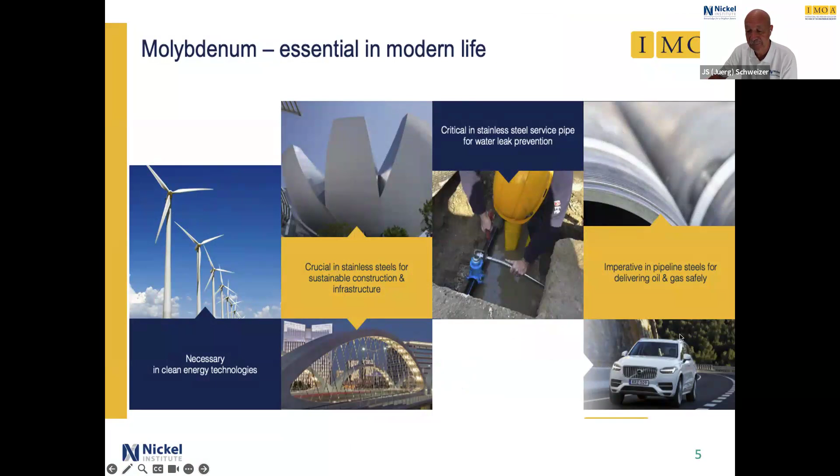And now to the most important part. It gives me great pleasure to introduce Gary Coates to you, who most of you already know from previous talks. He's our technical manager in the Nickel Institute and sits in Toronto. Gary is a metallurgical engineer who has worked in the stainless steel and nickel alloy industry for almost 50 years, the last 25 with the Nickel Institute. He has worked with many different end-use industries and with fabricators to ensure quality fabrication and long life of equipment. He is actively involved with many professional societies in the corrosion, welding, metals, and mining industries. He has made many presentations on all aspects of the use of stainless steel and nickel alloys. Gary is a professional engineer registered in Ontario, Canada. And now I would like to hand over the floor to you, Gary.

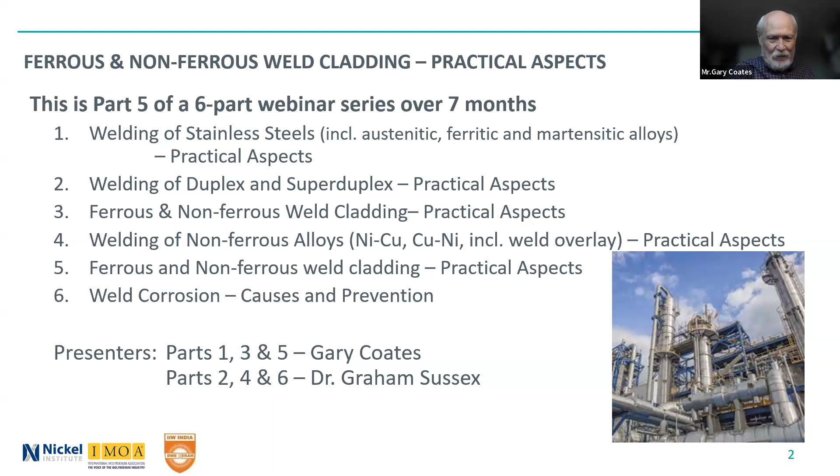This is part 5 of a 6-part series over 7 months. You can see the different topics we've talked about, and the 6th part, the final one, will be held by Dr. Graham Sussex on weld corrosion, which is an extremely important part of using stainless steel and nickel alloys. You want to avoid corrosion, and it's easy to have corrosion where you don't expect it. Make sure you sign up for that session.

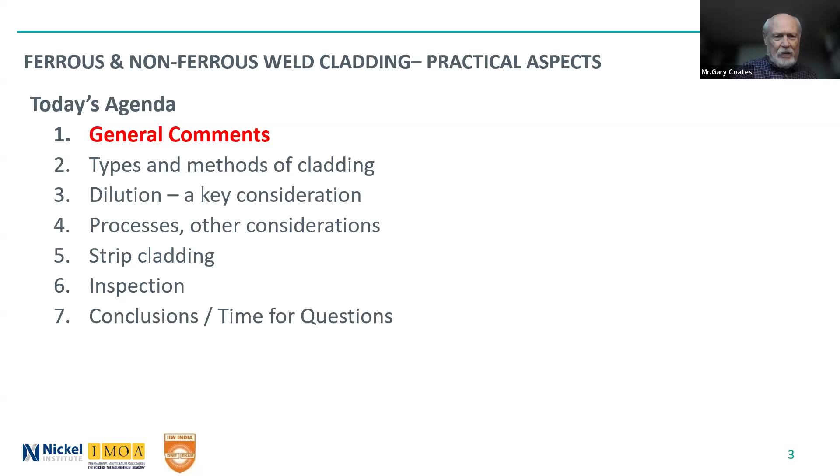So this is today's agenda. We're going to have some general comments, and talk a little bit about different types of cladding, because weld cladding isn't the only one - a very short part. Dilution is probably the key consideration when it comes to weld overlay. We'll talk about processes and other considerations, a special little session on strip cladding, which is relatively new, a couple slides on inspection, and then conclusions and time for questions. So what is cladding?

Essentially 2 or more layers of different materials that are somehow attached to each other. Sometimes we call it composite materials. In this webinar, we're going to primarily talk about where 2 different metals are metallurgically bonded together.

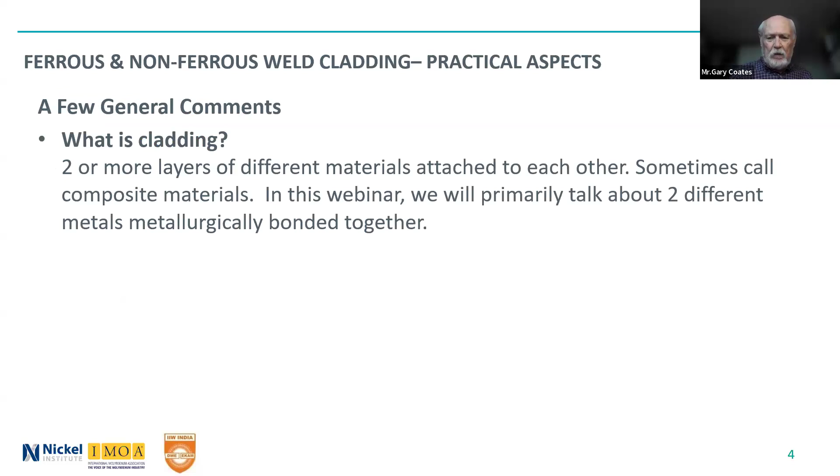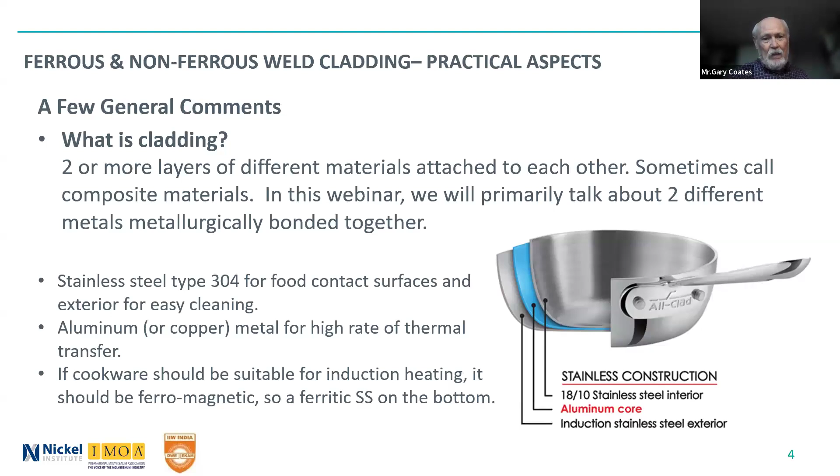Here's a common example of a stainless steel pot, a high quality one, where you actually have 3 different materials. You have type 304 for food contact surfaces, ideal for the interior and exterior for easy cleaning and hygiene. You have aluminum or even copper for the high rate of thermal transfer. And if you're using induction heating, you want the bottom part to be ferromagnetic, so a ferritic stainless steel is used there.

Why do we do that? Well, there are so many different advantages to doing a clad, depending on what you want to do. Corrosion resistance, of course, is the main one. Strength and mechanical properties - you might use one material that's very strong for one side, and want corrosion resistance on the other side. Thermal conductivity, weight saving sometimes, ferromagnetism - either for or lack of ferromagnetism - wear properties, electrical conductivity. But in a lot of cases, economics is the major factor here, and the idea is that using cladding, in many cases, is to reduce the cost.

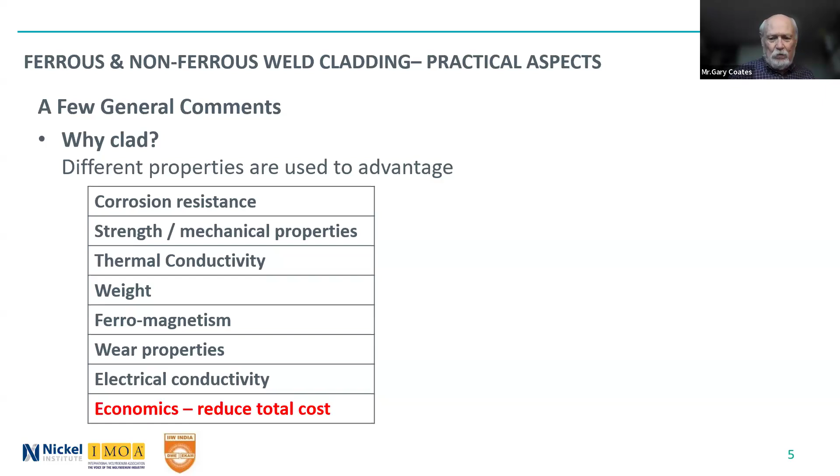Now in the case of the pot, no, it wasn't for cost - it was done to create a superior product, something where the pot heats more uniformly when you have that aluminum core.

So let's talk about economics. There's an assumption a lot of people make that says, well, if it's clad - if you have stainless steel on one side, carbon steel on the other - it's going to be less expensive than solid stainless steel. Well, that's not always true, and it depends on a lot of factors. I just list a few here.

The quantity needed - if you need a small quantity, it may not be less expensive. The relative cost of the two materials, the cladding process used, the thicknesses of the two materials. Obviously, if you want 3 millimeter of one material and 3 millimeter of another, the total cost may be more than if you use solid material. With clad, you have a lot more testing involved, non-destructive examination.

You may have to test the bond strength, or do special mechanical tests to make sure it's suitable for the application. And for corrosion, if you do a heat treatment, you might want to make sure the corrosion properties haven't deteriorated through the heat treatment. You might need special procedures for hot or cold forming so you don't tear the bond between the two materials, and special procedures for welding. So it's not a given that solid material is going to be more expensive than clad material.

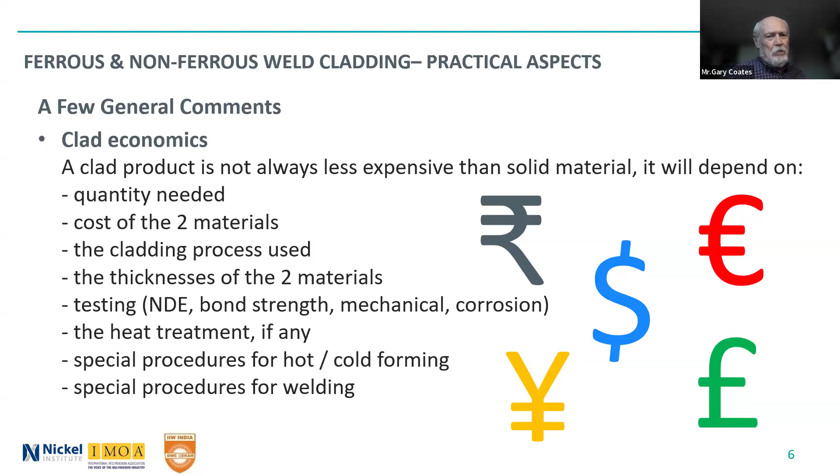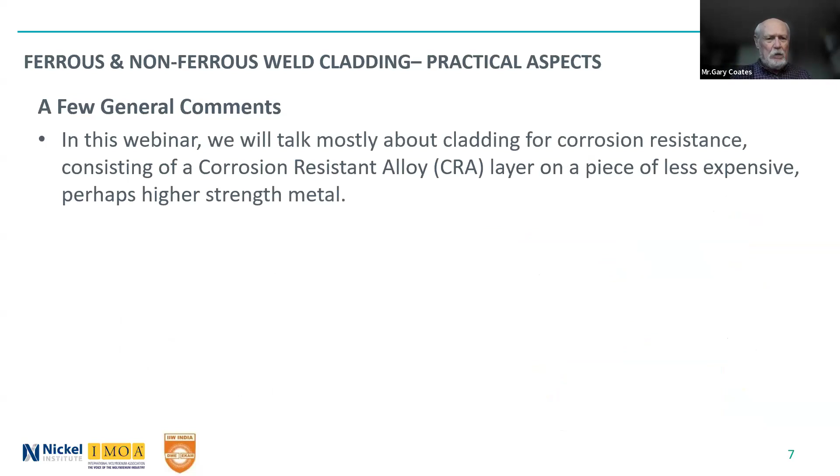So in this webinar, we're going to talk mostly about cladding for corrosion resistance. We talk about a corrosion resistant alloy, or CRA layer, on a piece of less expensive, perhaps higher strength material. So the top is a smaller, thinner layer of the corrosion resistant alloy, and we say the backing material is the thicker, less expensive material.

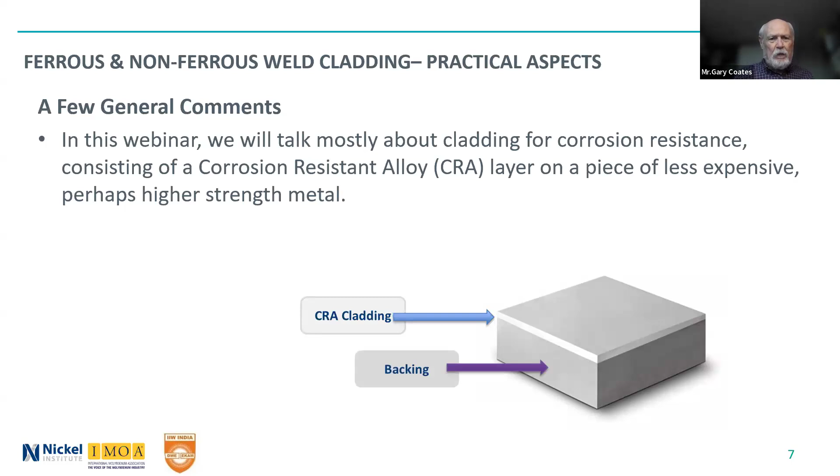I'm going to make a few general comments about possible materials, considering all the different cladding methods, not just weld clad, because not all these are possible. You can use different materials: plain carbon steels, high carbon steels, low alloy steels, chrome moly steels, quench and tempered steels. Stainless steels of all families can be used, whether austenitic, ferritic, duplex, etc. Nickel alloys of all families, including nickel copper alloys, and not particularly with weld clad, but titanium, zirconium, niobium, tantalum - all these special materials can be done by certain cladding methods.

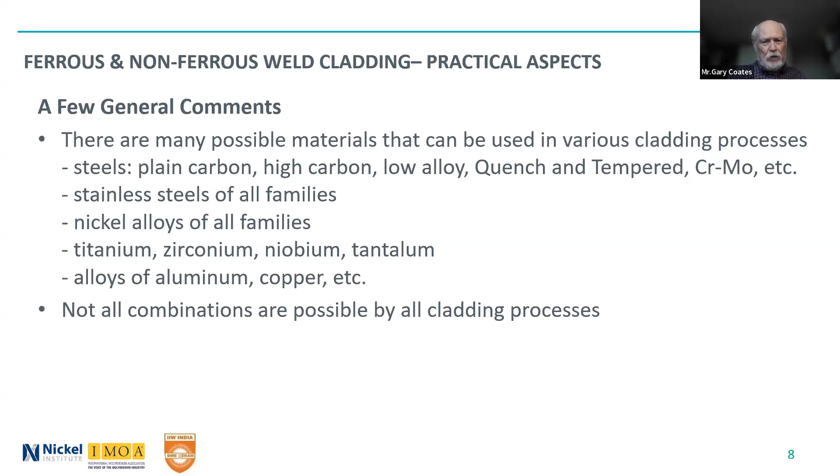And we get, as we saw with the pot, alloys of aluminum and copper can be done. I emphasize not all combinations are possible by all cladding processes, and we'll look at that.

So let's move on to the types and methods of cladding. It's important to understand that there are different types of cladding. We talk about metallurgically and fully bonded, and that's the ones I'm going to be talking about, and weld clad falls under that category. Partially metallurgically bonded - if you do a sheet lining, you line a tank with a thin layer of stainless, that we call partially metallurgically bonded because you're welding it in certain spots, but it's not totally bonded.

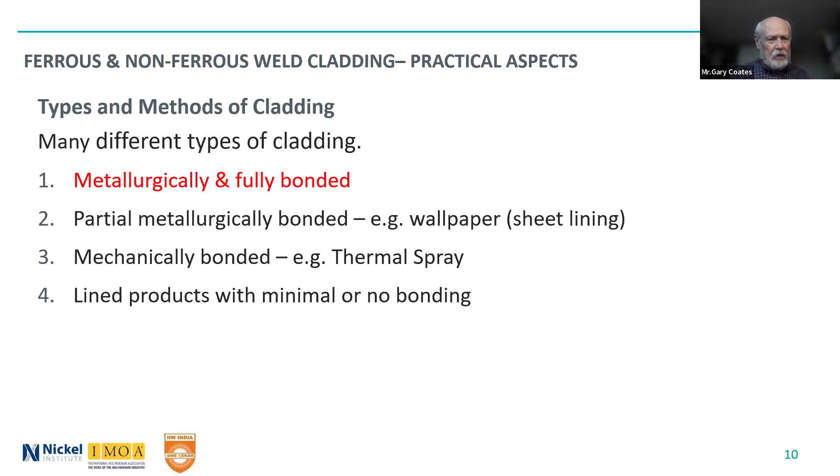Mechanically bonded - a good example of that is thermal spray. Thermal spray does not metallurgically bond the sprayed material to the backing material. It works in many cases, but not always. And then there are some lined products with minimal or no bonding at all. But we're going to only talk about the metallurgically and fully bonded materials.

And those can be, there's 5 examples of that. Weld overlay, of course, is what we're going to be talking about here. I'm going to briefly mention hot roll bonded and explosion bonded material, because each of these methods has their advantages and disadvantages. And of course, I'm not going to talk about additive manufacturing, but that's also one of the more interesting areas under development.

With additive manufacturing, it's very similar to weld overlay, except the whole piece is a weld material. And you can do transition layers - there you go from one material to a second material with additive manufacturing. A lot of work is going on in that area, and I really suggest to young engineers that are just graduating or have a few years of experience under the belt, that's an area that is really going to develop rapidly over the next few years.

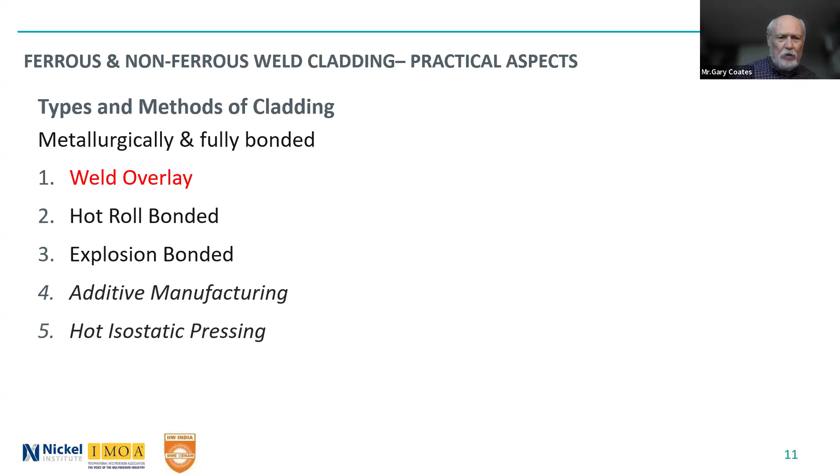And then there's hot isostatic pressing. You can do clad materials as well as solid materials, but I'm not going to talk about those last two processes. So let's talk about hot roll bonded material.

This is a very simplified production scheme. I've left out a few of the steps, but just so you know how it works - on the left, you make a sandwich. So you have a backing material, a CRA layer, another CRA layer. These are all plates or sheets, and then more backing material. You actually weld it up, suck out any air that might be there.

And then at a conventional rolling mill, you heat the slab up and then roll it to the final thickness. You do a heat treatment, and then you eventually separate the two plates. You have a separating compound in between that doesn't allow the materials to fuse together, and then you have your quality control step.

Well, this method is suitable for large quantities of clad material. They have a long delivery time - depends on what it is, but 3 months, 4 months, 6 months can even happen there. You do need to test for the bond quality and the strength. Is it fully bonded over its whole area, or has an area not bonded properly? And what is the strength of that bond?

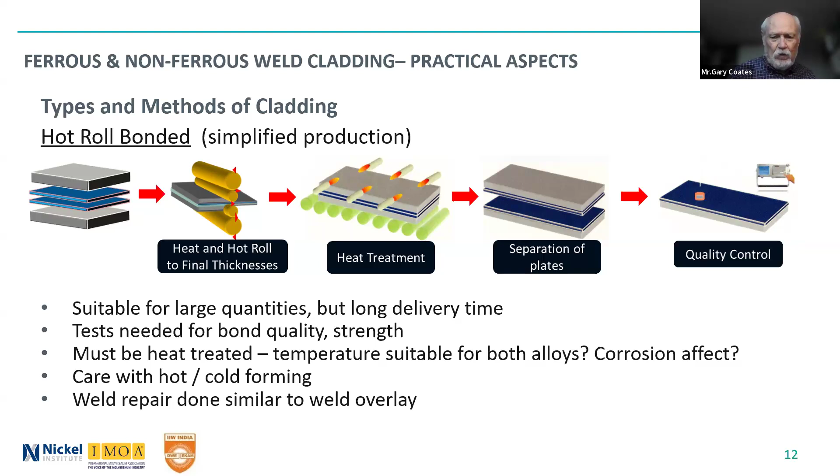The second major method is explosion bonded. Essentially you have your backing material on the bottom, you have a compound on top of that, and then you have your CRA layer on top of that. You put your explosive on top of that, and you get a big bang explosion there, and that will do essentially a pressure weld into the two materials. The cross section on the right shows that if it's properly done, you get a really, really good bond there.

So it is a very popular way of cladding. There's no heat involved in it. You might think, okay, with the explosion, you get heat. Well, there's really essentially no heat involved.

Advantage of this is shorter delivery time. If you can get both plates in stock, you're not changing the thickness, so you need the exact thickness you're after there. You can only do flat shapes, although they can be formed afterwards, of course, made into pipe or a head or whatever. One key factor: you don't need to anneal them after, but you usually do a stress relief.

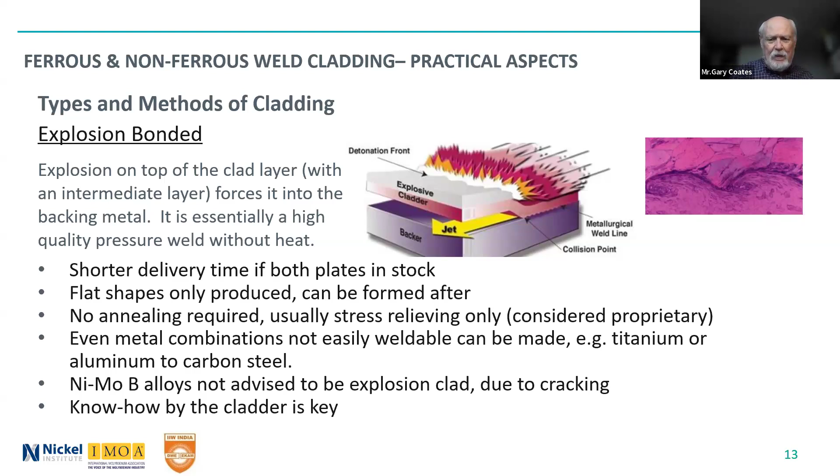There are a few alloys that you don't want to explosion clad. The nickel molybdenum Hastelloy B type alloys tend to crack because of the high stresses involved. Know-how is very important for the cladder. There's a lot of cladders who say, oh yeah, we can do that, and then they try it and say, oh, I guess we can't do that. So know-how is very important there.

We'll talk about each of these factors more a little later, but with weld overlay, just as a quick comparison, you do it in your fabrication shop. There are specialist companies that specialize in weld overlay. You can do a small job quickly. Somebody wants it done in 8 hours, and if it's a small job, you probably can do it in 8 hours. It's relatively quick for larger jobs too. So that is probably the number one reason for doing weld overlay.

You can do shapes. You can weld clad a head, because of course welding can be done out of position too. So that is a major advantage. Most often, no annealing is required or even wanted. We'll talk about that more. You might want to do a stress relief in some cases. Only alloys that are weldable can be used, so you can't do titanium on top of carbon steel, for example. They have to be weldable to each other.

We'll talk about the weld metal being slightly different composition than the wrought material, whereas with the other two methods, you're using wrought material. That occasionally is a factor. And you have to consider dilution of the base metal, and that's what we'll talk about now.

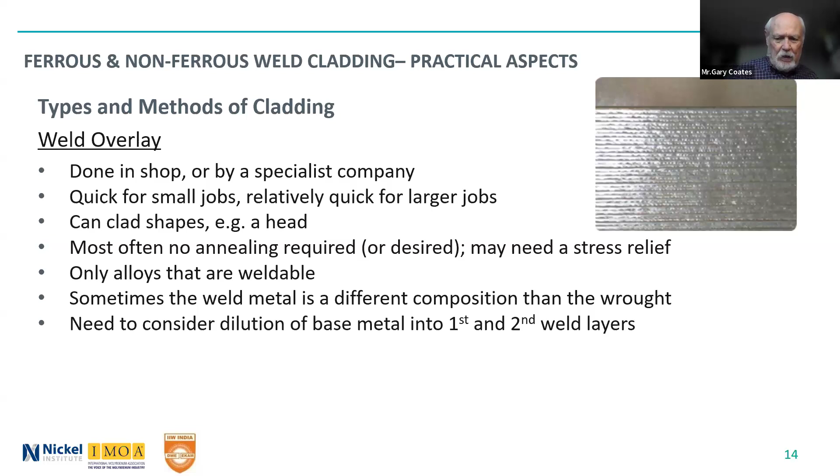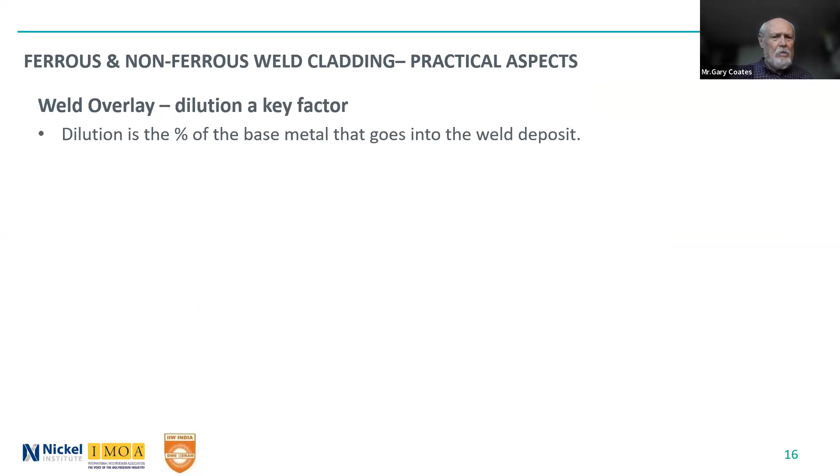So dilution, as a definition, is the percentage of the base metal that goes into the weld deposit when we're talking about a weld overlay. For example, I'm going to take a case where the end user wants a minimum of a 304L stainless steel composition on the weld overlay, and you want to do it with a single pass weld. Most often you don't, but we're taking that here using 309L, which is the filler metal that you normally would use if you're welding stainless to carbon steel.

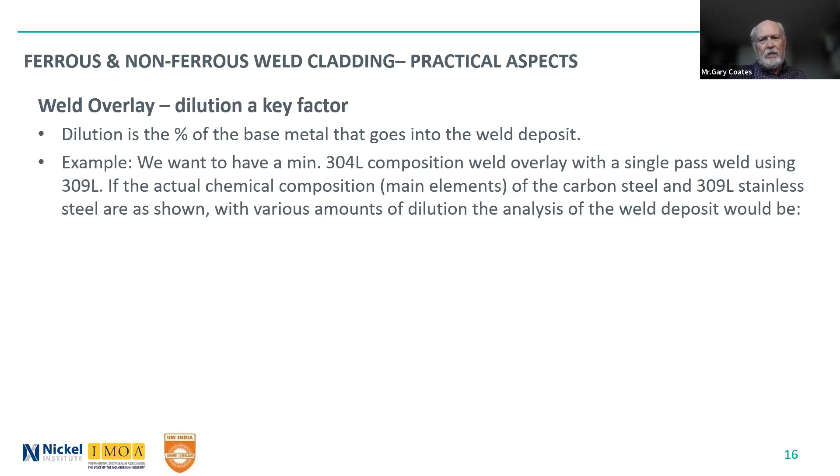You want the actual chemical composition, the main elements of the carbon steel and the 309L, and we'll show them here. So in the carbon steel, essentially of the three that we're concerned about here, it's only carbon, and I'm just taking a figure here, 0.15, and the stainless steel 309L weld wire has low carbon, high chrome, high nickel.

So if you then say, okay, I can do a weld process that has only 5% dilution, at the bottom is the 304L composition. I didn't indicate the maximum chromium and nickel there, but we'll talk about that shortly.

If we do a weld with 5% dilution, which is really not easy to do or almost impossible to do, you could see that we can actually meet the carbon content less than 0.030 max, and you meet the minimum chrome and nickel contents there. Now that's above the 304L composition limit for chrome and nickel, but in many cases that is acceptable depending on how the end user has specified it.

If we do 10% dilution, a weld process that has 10%, you can see that we just exceeded the carbon content. That may or may not have any significance depending on the application. And again, the chrome is above the limit for 304L itself, but usually acceptable, and the nickel is actually into the area where it is within specification.

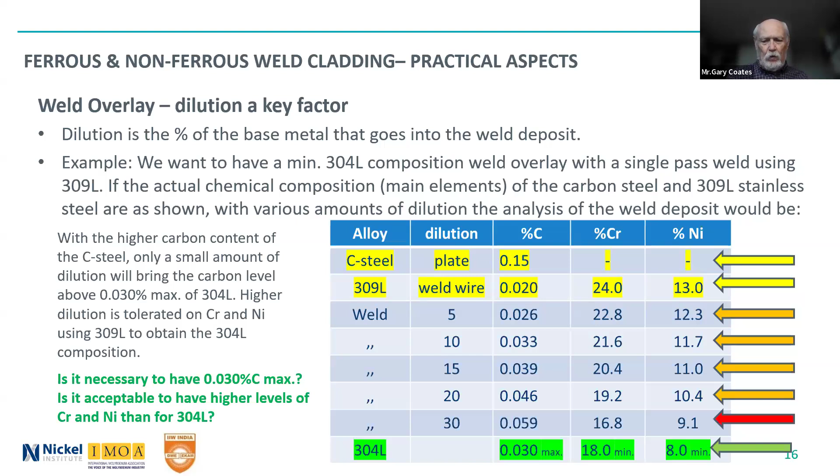And that's always the question. Can you live with that? Can the end user live with that? And is it acceptable to have higher levels of chrome and nickel than 304L?

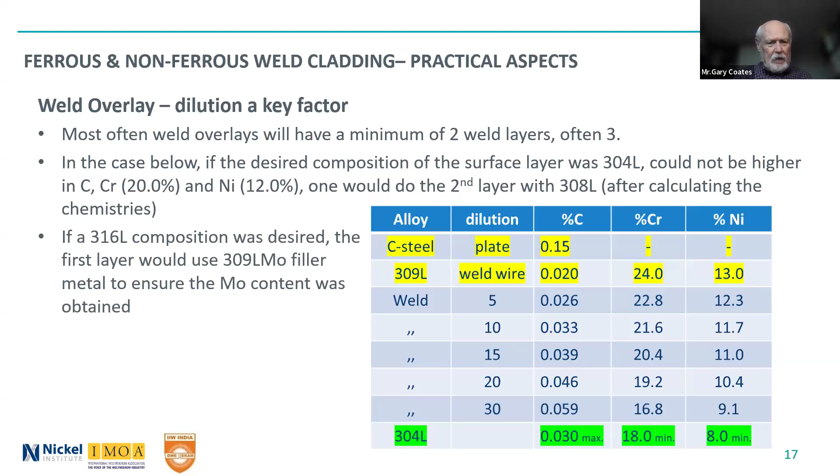So most often our weld overlays will have a minimum of 2 weld layers and often 3. In the case where you really wanted 304L on the surface layer and you didn't want the carbon higher than the 0.030 max and you wanted the chrome nickel to be in spec, you would do a second layer with 308L after calculating the chemistries out, depending on the dilution of the first layer. If you wanted 316L, you would actually start with a 309LMo filler metal because 316L has 2.0% minimum molybdenum. So you got to make sure that you get the higher molybdenum content in that first layer, the transition layer.

So let's talk about processes, and we'll continue on with the dilution discussion with the different processes here. This chart shows a lot of information, actually, which you need to study in depth. Basically, we're talking about the deposit thickness of a typical weld overlay with different processes, the deposition rate, which of course for economics of production is very important. There's the dilution, which we talked about, deposit efficiency, how much you get - that again is an economic factor. And of course, the consumable material used there.

So if we take gas tungsten arc welding or TIG welding, you don't get a really thick deposit. You don't get a high deposition rate. It's relatively slow, as we all know, but you do get low dilution, or at least you can get low dilution. And that's one of the factors to consider - if you can do it in 1 layer or 2 layers with low dilution, you can be more economical that way.

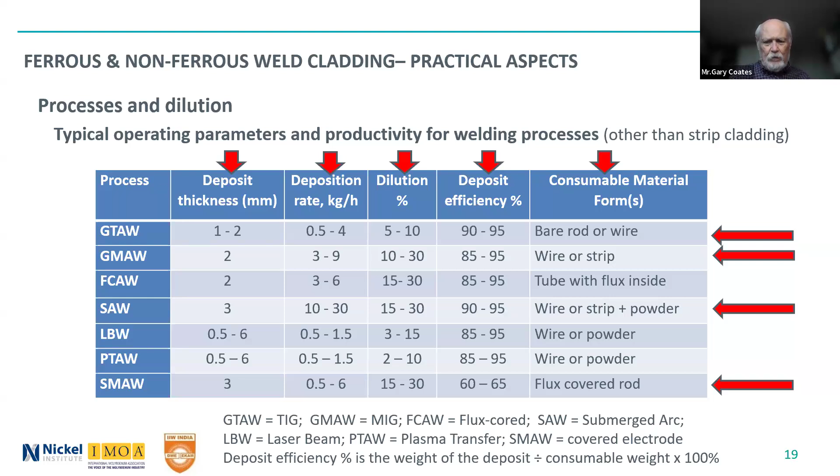This chart shows different processes and their deposition rates. If you're doing a large job, sub-arc is very effective, but if you use the sub-arc double wire process, you can get even higher deposition rates, probably without much change in dilution. The bottom ones are actually strip cladding, which we'll discuss separately.

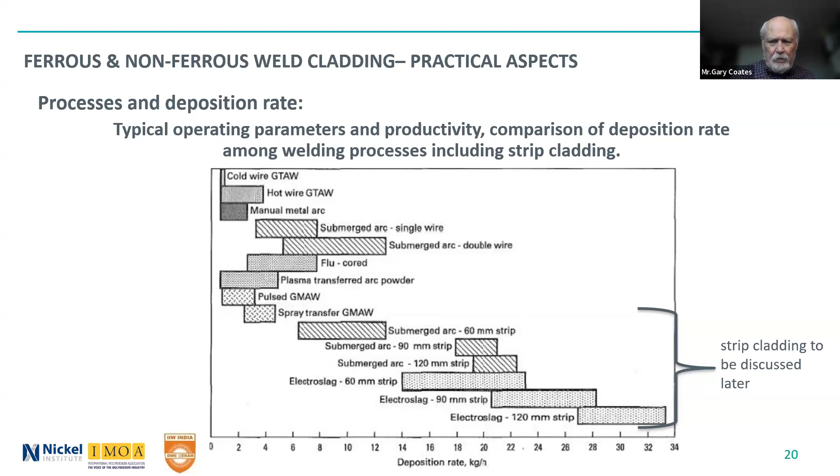So regarding the advantages and disadvantages of each process, we've already talked a bit about this, so I won't go into detail, but one reason flux core isn't used so much in weld overlay is the issue of slag removal. Sometimes that's not easy—if you're doing several layers, you have to make sure the slag is carefully removed.

The laser has expensive equipment to set up. It works well and you get low dilution, but it's very specialized equipment. Same with plasma transfer—it's not easy to do. There are some specialist companies that use these processes, but I'll leave that chart as part of the presentation for you to review when looking at how to do a particular job.

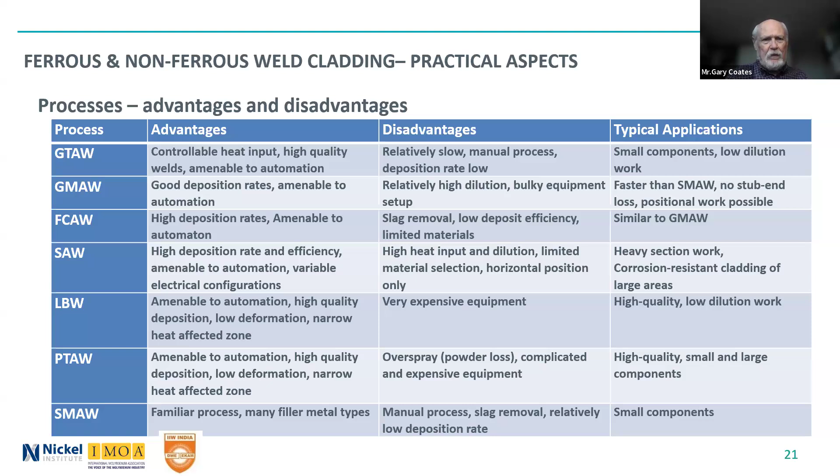Let's talk about a few other issues. One is there can be differences between the weld metal and the wrought material which may affect performance. Of course, chemistry is one of those things—it's sometimes different than the wrought material. So if somebody says they want alloy C22, nickel as the CRA layer, the chemistry in that case is very similar but a little bit different. Other alloys can be more different.

On the other hand, if you're welding two pieces of, say, C22 together using C22 filler metal, well, you already have it there, so usually that's not an issue. It can be an issue in a few very unusual cases, but it's something to check if somebody is asking for clad material of a certain alloy.

You have a cast structure of a weld versus the wrought structure of a plate. The same is true if you're welding two plates together—you have the weld, which is cast structure, versus the wrought structure of the plate. Again, there are a few cases where that is significant.

In austenitic stainless steels, you have a ferrite phase that's not present in the wrought material. Sometimes ferrite phase can be positive—one example is preventing polythionic stress corrosion cracking, which happens a lot in the oil and gas industry, so ferrite can be a benefit there over wrought material. Sometimes it's negative, because ferrite will embrittle at high temperature, reducing toughness or ductility.

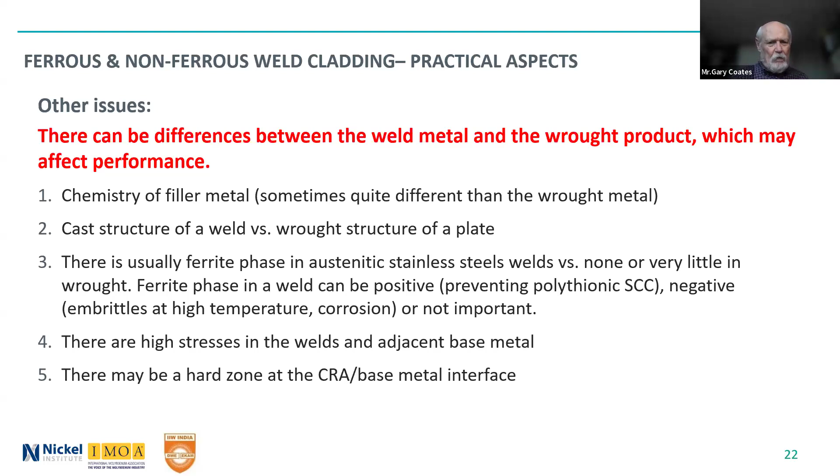There may also be a hard zone at the CRA base metal layer. If you use 309, you can get a very thin area with some martensite present, which may affect properties if you're doing any severe forming operation on the piece. It's just something to be aware of—you can't assume you can treat it like solid material.

So the compatibility of the filler metal against the backing material, essentially it's a dissimilar metal weld - austenitic stainless steels to carbon and alloy steels. You generally use 309L or 309 LMO, depending on whether you want the molybdenum there.

Occasionally you might use a nickel alloy for that, even if you want a stainless steel there, because the nickel alloy does not usually form that martensitic layer. The 309L, 309 LMO has a fairly high ferrite content, as you're well aware from the weld deposit. It's there to give better hot cracking resistance because carbon steels often have higher sulfur and phosphorus content than stainless steels. So that's a benefit, but you really need to, as welding engineers, calculate the expected ferrite content based on the actual chemical analysis, not the typical.

You don't want to use that. You want to use the actual chemical analysis of the backing material and the filler metal. So you have to make sure you get the actual analysis for those.

And then you have to estimate the amount of dilution. What most people will do, let's say you're doing it with gas metal arc welding, which has a wide range - you might say, with the amperage I specify in my WPS, it'll be 15% dilution, but you might want to look at both 10 and 20% dilution, sort of extremes, to see whether you're covered, just in case something happens where we're on the night shift when nobody is looking and the welder wants to get it done quickly.

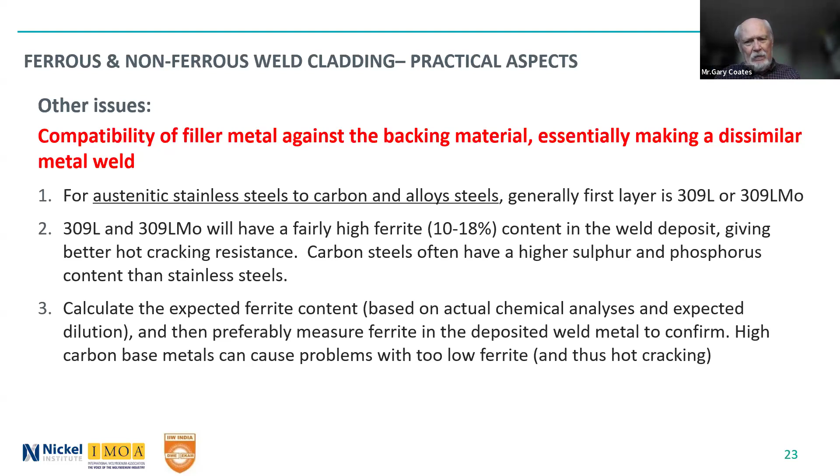The high carbon base materials, for example the 1040 carbon steel with 0.4% carbon, even with the 309L, can result in too low ferrite and hot cracking.

For nickel alloys to carbon and alloy steels, generally you don't need a special intermediate first layer. You most often use the nickel alloy that you're working with.

There are exceptions to the rule, as there are, as we all know, in welding. So the nickel copper alloys, you do need an intermediate layer - we sometimes call it a butter layer - perhaps pure nickel, perhaps another nickel copper alloy there. And that information is in the literature on what to do there.

Now, alloy 625, nickel chrome moly 3, or ER nickel chrome moly 3, is really the most common nickel alloy used for corrosion resistant overlays. It's relatively easily applied, readily available, and of the nickel chrome moly alloys, it is really the lowest cost. So it is used extensively for weld overlays.

So you have to be very careful about too high heat inputs. I remember a case where a fellow in Canada did an overlay with 625. He used the submerged arc process. He had a flux that welded beautifully, but it gave hot cracks.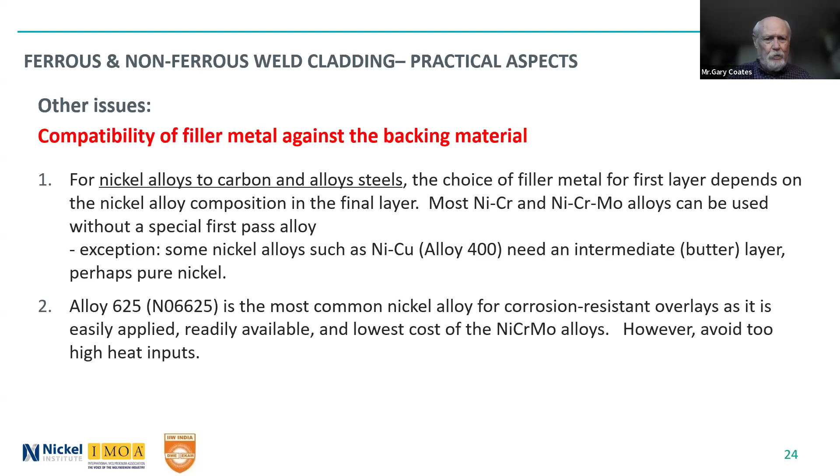So, heat treatment - and I saw there was a question in the chat already, or in the Q&A, about this.

You don't need any sort of heat treatment usually for the stainless steel or the nickel alloy, but you may need it by code purposes for the backing material. It's often a stress relief kind of material, especially for oil and gas, or when you have hydrogen sulfide there. So often it is done after the first pass is completed - you do one pass, then you do the stress relief, then you do the other one or two passes of weld overlay after that. You don't need to do a heat treatment by code after that.

Simply put, stainless steel nickel alloys wouldn't normally be heat treated if you were welding solid pieces, so you don't need to do it after the final welding. But for the backing material, the carbon or chromoly steel underneath, you may need to do it. When treating the whole piece, you have to choose an appropriate temperature suitable for both the corrosion resistant alloy layer and the backing material. That can be a challenge, and sometimes it's a compromised temperature that's best for the corrosion resistant layer.

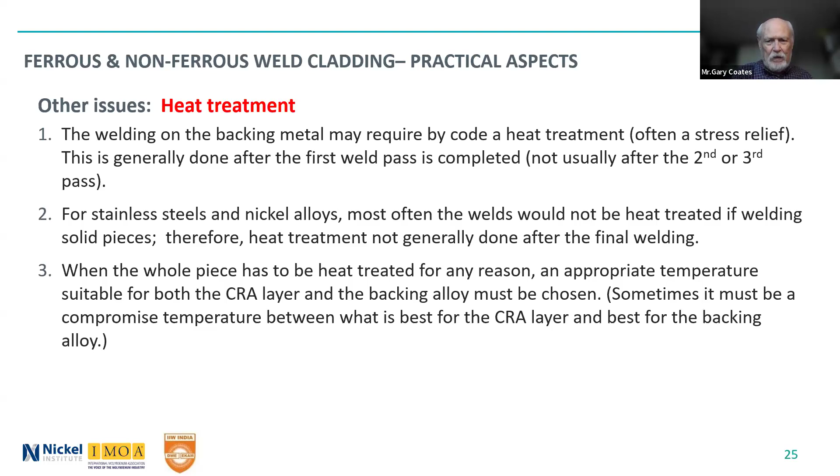I'm going to take an example of a nickel alloy overlay on a tube sheet. They wanted a pure nickel - using nickel 200 or alloy 200 for the tubes. You want the tube sheet to have that weld overlay, so you use either ENI-1 or ERNI-1, the filler metal for welding alloy 200. The filler metals contain less nickel, 92 and 93%, than the wrought material. But if you were welding alloy 200 to itself, you'd be using these, so obviously this is acceptable.

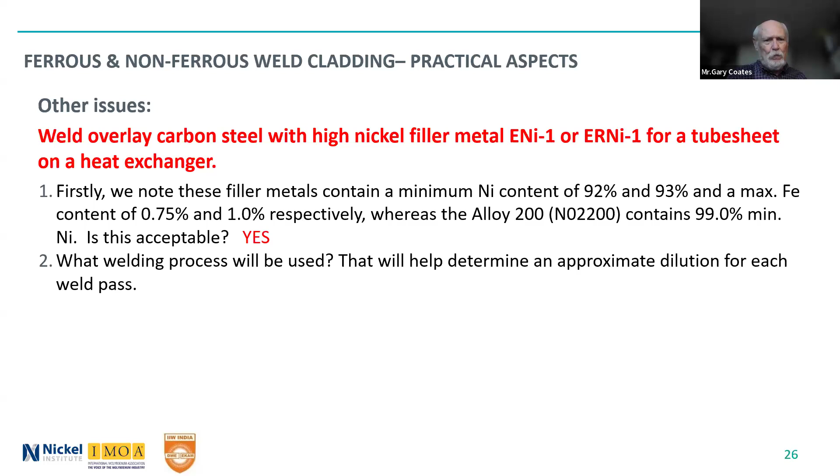What welding process is used will determine an approximate dilution for each weld pass. Assume 15% dilution of base metal into the overlay, and assume the carbon steel is 100% iron. The first pass: 15% dilution means 15% iron goes into the weld overlay from the base metal, plus a small amount from the filler metal, 0.4%. So you have 15.4% in the first pass - that would generally be considered unacceptable.

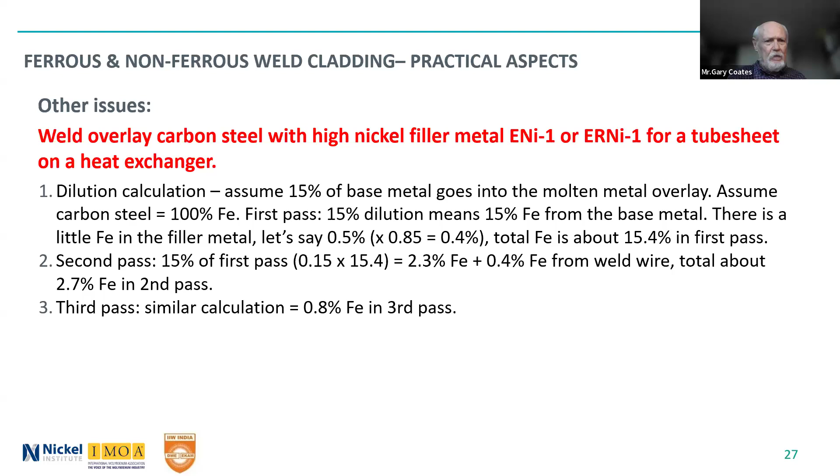In the second pass, you have 15% of the first pass carried in, plus a little from the weld wire, giving 2.7% iron - perhaps you can get away with that. Some people may want a third pass, getting only 0.8% iron. You have to say what level of iron is acceptable for that particular job. If it's caustic service, normally 2 or 3% iron is acceptable. If you can guarantee 15% dilution, a 2-pass weld should be acceptable, but if you're not sure you'll get 15%, it could be higher - you really need to think about that.

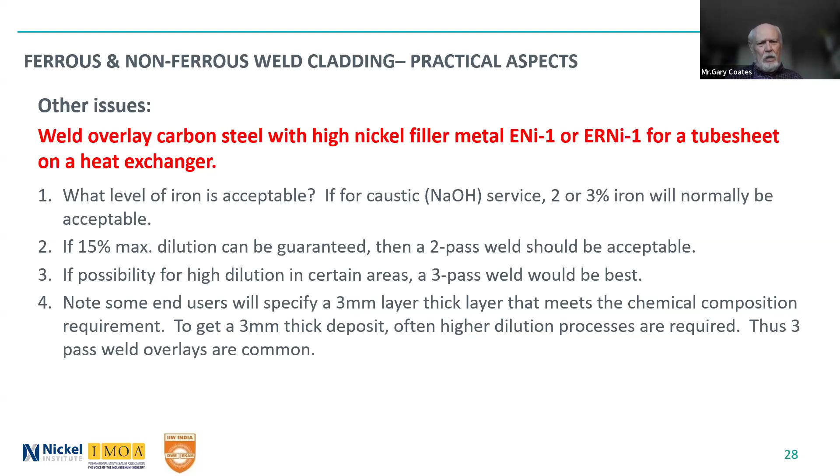If the end customer does an analysis of the top layer and finds it's actually 5% iron, he may reject it and you may have to start all over again. Some end users specify a 3 millimeter thick layer of weld overlay that meets the composition requirement, so sometimes you need a higher dilution process to get that thickness, as we saw from the earlier slides. So 3-pass weld overlays are fairly common for very severe service.

I'll briefly talk about strip cladding. Instead of wire, you're using a strip, typically 0.5 millimeter thick and 60 millimeter wide - wider strip is also available. There are two main processes: submerged arc and electroslag. The subarc welding is like using wire subarc but with a strip. The electroslag welding uses a special flux high in fluoride, electrically conductive, giving very high deposition rates.

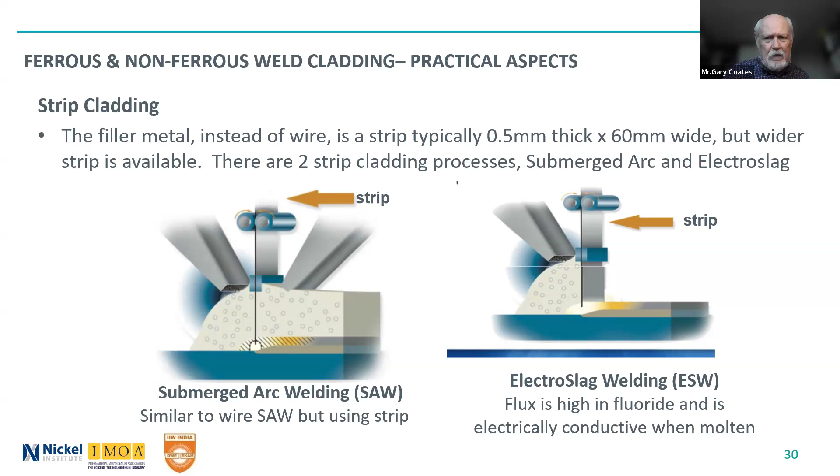The advantages are high deposition rates with low dilution, and a clean and smooth surface - a weld overlay done by wire will be rippled, and sometimes needs to be machined smooth in certain cases. You also get less distortion, deep weld penetration, and minimal fumes. However, strip cladding is only for the flat position. It's best for long, straight seams, and you can use it on rotatable vessels or pipes if they're large enough to rotate.

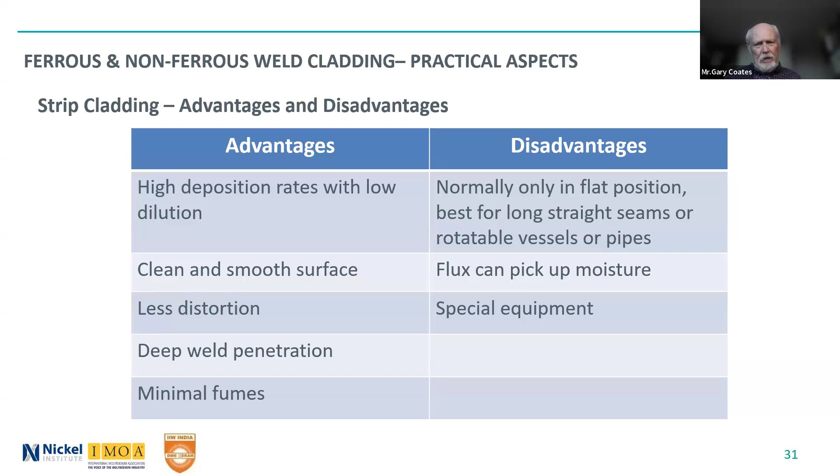You can use it, but otherwise, it has to be flat position. As in most methods that use flux, they can pick up moisture, and you need special equipment.

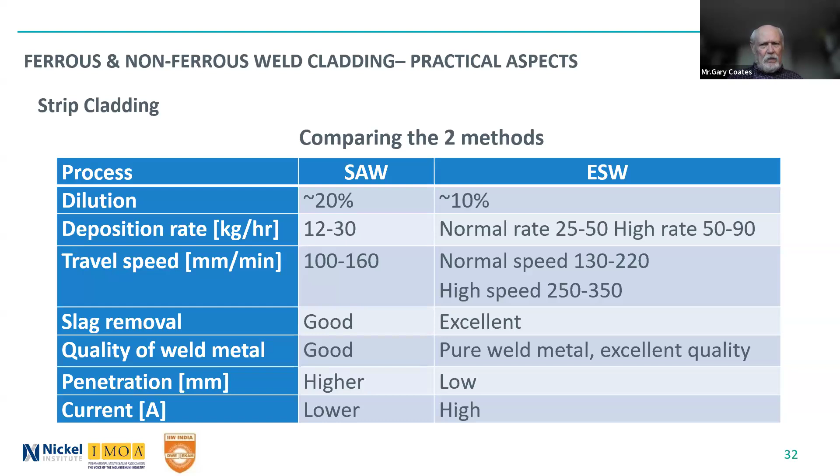So this is comparing the two methods of strip cladding. The submerged arc one has a higher dilution rate than electroslag welding. The deposition rate is higher for electroslag welding. Travel speeds are typical there, though you can do some very high speed ones. Slag removal is easier on the electroslag. The quality of weld metal is pretty good for both, but electroslag is slightly better. Penetration rate relates to dilution too, and with electroslag you can get some very high currents.

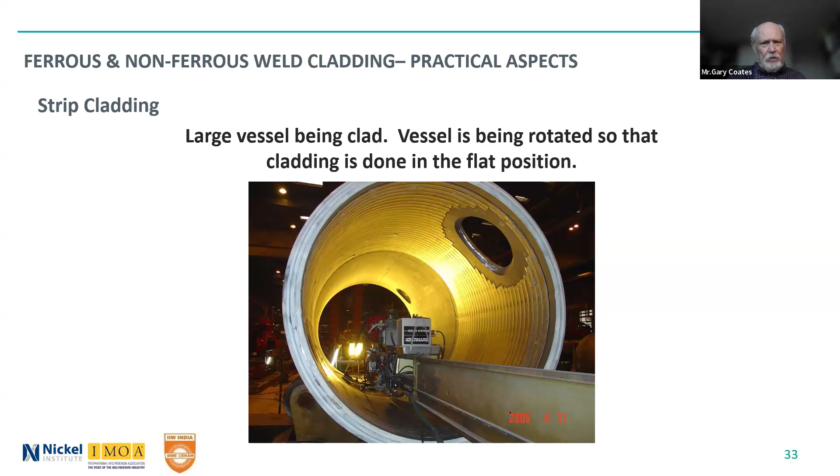Just taking one example here of weld overlay of carbon steel with 2205 duplex stainless steel using the standard filler metal 2209. This compares if the post-weld heat treatment is required versus not required. If it's not required, you do 3 weld passes of 2209 and you get the 2209 composition on that third pass.

2209 can be used as the butter pass, that first layer, in that case, because it is suitable for the carbon steel, but you don't want to do the heat treatment on it. If a post-weld heat treatment is required, you do a first pass with 309L, then do the post-weld heat treatment. That works well - it doesn't deteriorate the properties of the 309L. Then you do 2 passes of 2209 on top of that. The top deposit is again equivalent to the 2209.

If you use the ESR process, you can actually do it with 2 passes there because of the low dilution content. So there are some advantages of using the ESR process, even though it is more expensive. But in doing it, it can actually save cost in the long run.

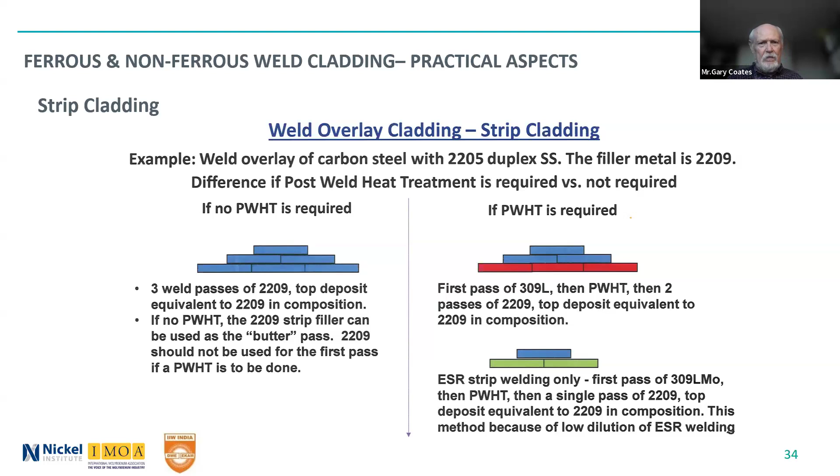Finally, just a few comments about inspection, and you all are in the welding business, so you're familiar with the problems that can arise during welding - porosity, which can occur if the welding isn't done properly, or if the base metals are not properly cleaned, or there's contamination of the gas mixture. Where there is a flux, slag inclusions - you don't want them in the weld overlay layer. Oxide inclusions are mostly an issue with nickel alloys, but you have to be very careful, more careful with nickel alloys than with stainless steels in this regard, in the cleaning between passes. Solidification cracking - again with nickel alloys it can be tricky because the cracks may not form immediately, so you have to be very careful there.

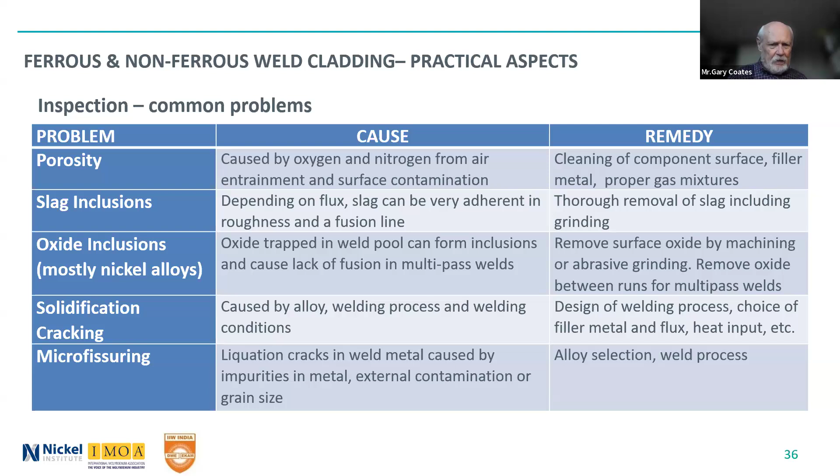And micro fissuring - again, it's making sure everything is clean. There are some issues with grain size on certain of the high temperature alloys.

Inspection techniques are no different than if you're doing a normal weld - visual inspection. If it doesn't look good, if it looks very rough or very dark in color, you need to almost start all over again and get it right the first time. Radiography, ultrasonics can be used, dye penetrant, especially for the smaller surface discontinuities. Often it's done between weld passes to ensure there are no micro cracks or micro fissuring there.

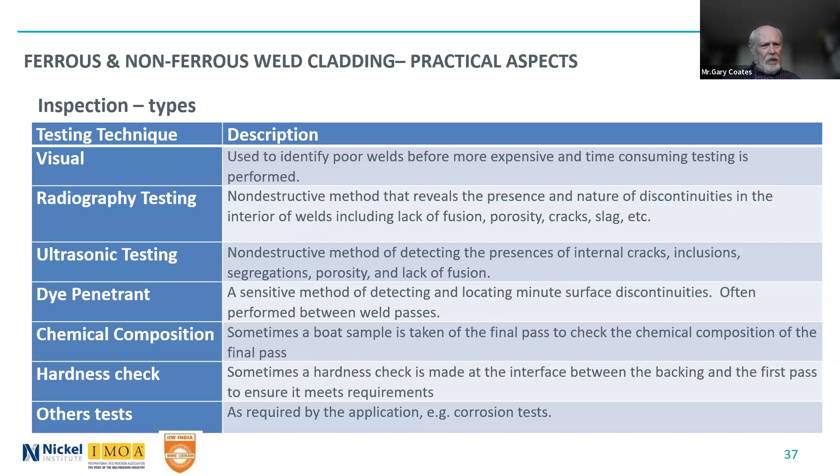Often a sample, we call it a boat sample, you take with a grinding wheel to check the chemistry of the final layer, and then you can weld overlay back on top of it to bring it back. That is often done. Hardness checks can be done, especially on the first layer, to make sure you haven't got any embrittlement there, and other tests as required by the application.

In conclusion, weld overlay is one method of cladding a lower cost material with a corrosion resistant stainless steel. There are other ways to do it, but there are many advantages to doing it. You do it often in a fabrication shop or a specialist firm set up to do it with some of the more specialized equipment. I want to emphasize that the welding engineer has to be very thorough and careful in considering all the factors involved in making sure you get a high quality weld overlay that has the mechanical properties and corrosion resistant properties that the end user wants. And that applies even to other methods of cladding too.

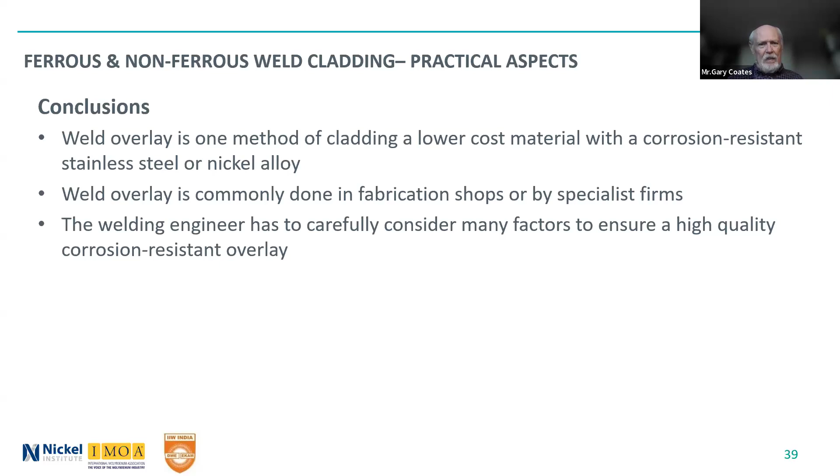It is really an extra step that has to be done over using solid material. So in the end, you have to also look at the total cost of doing all this, the inspection and everything. In some cases, it can be just as easy to say it's simpler if we use solid material. But of course, if it's very thick material, often you want to use the weld overlay cladding.

So I will take some questions now. There are a few questions in the Q&A. I request if you can read it, or shall I read it? Yeah, there's a Q&A. I can look at them here.

The first question: in sour service, do we need post-weld heat treatment for cladded overlay material weld joint? In this particular case, it's 28 millimeter X65 pipeline steel with a 5 millimeter 625 overlay. What is the post-weld heat treatment temperature? I would have to look that up, but generally I would say yes. When you get into those kind of thicknesses, as far as I know with most materials, you really do want to do the post-weld heat treatment, and you usually want to do it after the first layer. Now with 625, you can actually do it as the final one too. It's very... it was not sensitive to the post-weld heat treatment for shorter periods of time. I'd have to look up the weld temperature because that's for the X65, it isn't for the 625, and I'm not sure what it is for the X65 material.

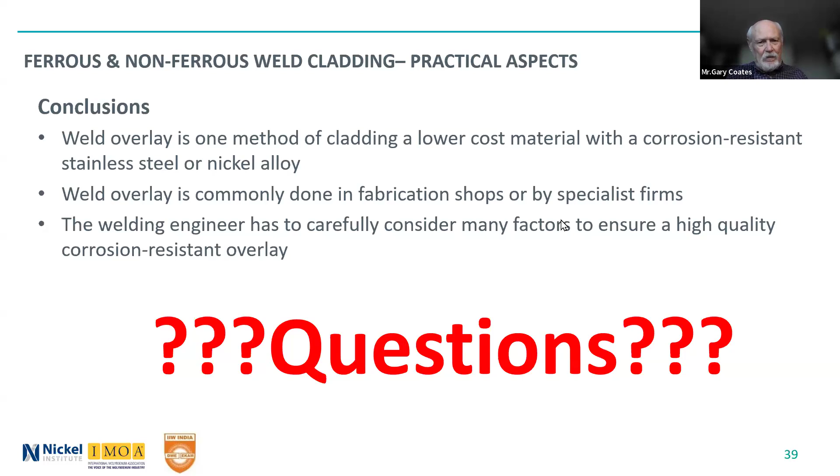What about distortion in the weld overlay case? Well, you can't weld overlay, say, a 3 millimeter thick piece of plate without getting distortion. You obviously want to reduce the amount of heat input going into thinner material, but yes, you may need to straighten it out afterwards. Not so difficult with a flat piece, but if you've got a formed piece, that could be difficult. Distortion is a potential issue on thinner sections there, just like when you're welding two pieces of plate together.

How can we achieve E410 weld metal chemistry to meet 410 clad and base metal, 5/16, 60 or 70, required height of weld overlay I guess is 6 millimeters? That is tough. I'd have to think about how to do that. I mean welding 410, I presume it's a 410 where you're not looking for high hardness, you're just looking for 11-12% chromium content in the overlay. I've never come across it done that way. I'll have to think about it. You might want to use... yeah, I'll have to think about that one. That's a very unusual one. I don't know about the total thickness there.